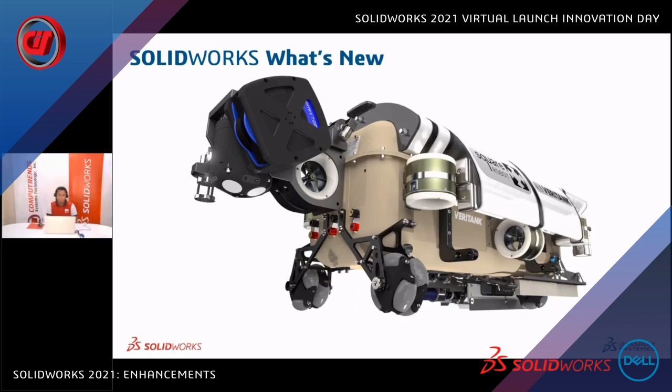As we dissect this incredible assembly from Square Robot, we will showcase the groundbreaking enhancements of SolidWorks 2021. We've added countless enhancements by expanding functionality that will simplify and speed up your workflows. With popular demand, we have increased our focus on performance, reliability, and optimizing pre-existing workflows to work exactly as you always intended.

We will show you many of our exciting SolidWorks 2021 enhancements one by one, so you don't miss out on anything this release has to offer. We will focus on three major topics: expanded functionality, performance, and SolidWorks 2021 in action.

Expanding SolidWorks capabilities always presents opportunities to approach your design challenges in new and powerful ways. SolidWorks 2021 delivers new tools that will streamline your workflows, improve your productivity, and deliver better performance and reliability.

Let's start with expanded functionality. Assembly modeling delighters: we have better mate and pattern control, and Excel-based interference reports.

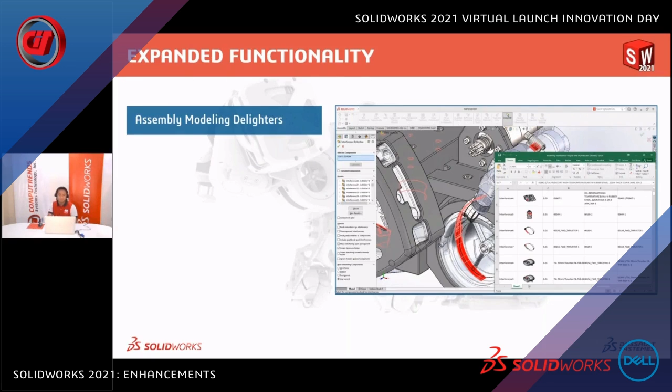Enhanced assembly simplification, faster open times of files, faster loading of lightweight models, and now we can save feature versions as configurations, with improved graphics performance.

More flexibility for part design: we can redo more than 60 features with SolidWorks 2021. Edge flanges on non-planar edges, equations in file properties, and the ability to use the color picker anywhere.

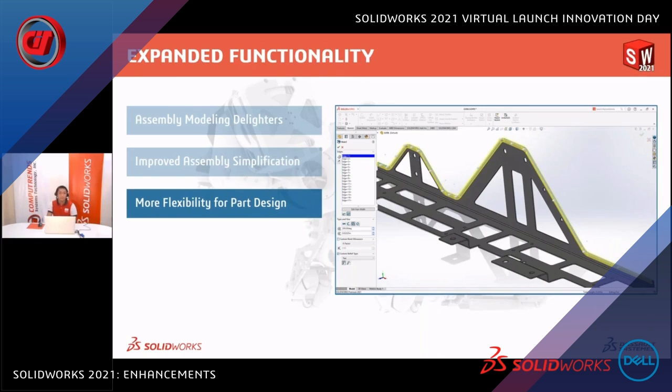SolidWorks has been known to have an intuitive and customizable user interface. However, by listening carefully to users, SolidWorks 2021 is packed with enhancements that make it easier to use and more customizable.

We'll find an improved color picker that can refer to other applications such as a web browser, a command search within the customize dialog that makes it easy to customize toolbars, a customizable command manager that gives you more space to work, as well as semi-transparent dimensions, making it easy to select dimensions.

For performance, all-new performance-based enhancements in SolidWorks 2021, from new performance enhancements to assemblies and drawings, to more powerful simulations, will ensure that more of your time at SolidWorks is focused on design.

Detailing mode enhancement for performance: speed up your drawing creation with improved detailing mode, with even more editing abilities.

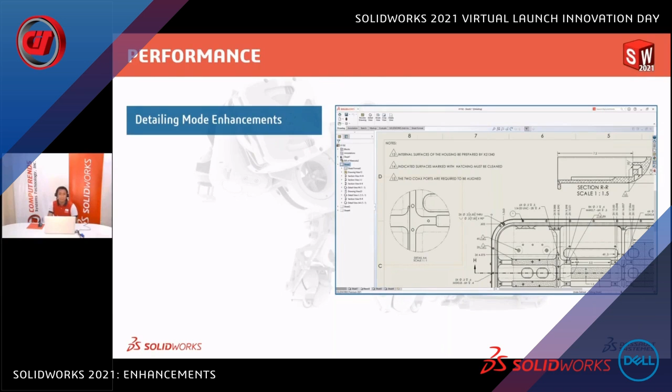Drawing performance: SolidWorks improves drawing performance for selection, panning, and zoom, regardless of how big the file is, making your everyday work faster.

Graphics performance: enhanced scaling and silhouette edges, and use more of your GPU for faster frames.

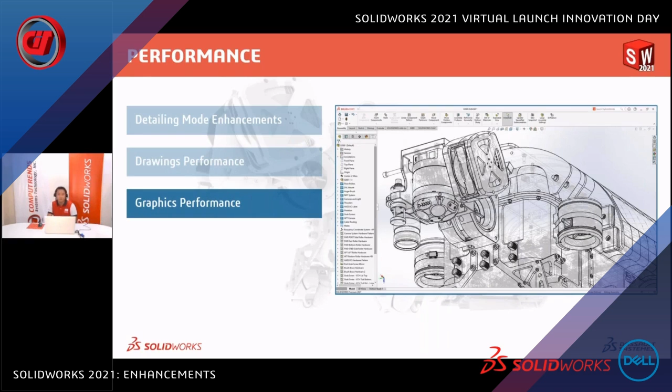Assembly performance: faster file operations, configuration switching, and automatic lightweight mode resolving, all helping with the most complex assemblies.

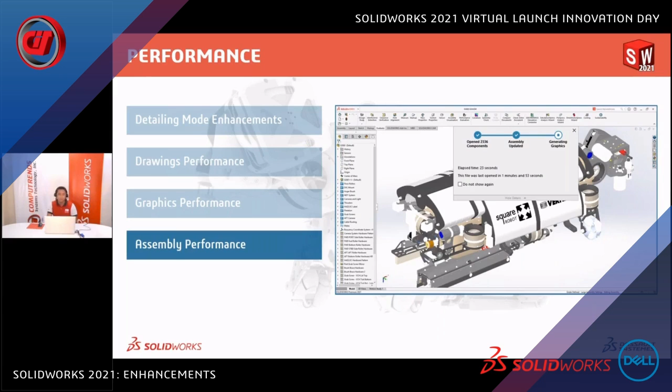Every year, SolidWorks focuses on enhancements, innovation, quality, and performance. This year, SolidWorks is devoting 58% of its resources to one thing: quality and performance. These are areas that have always been a focus for SolidWorks, but this year there has been a lot of effort to achieve some notable improvements.

SolidWorks 2021 and the development cycles associated with it closed more SPRs than any other SolidWorks release. This has resulted in a 25% increase in verified fixes since 2015.

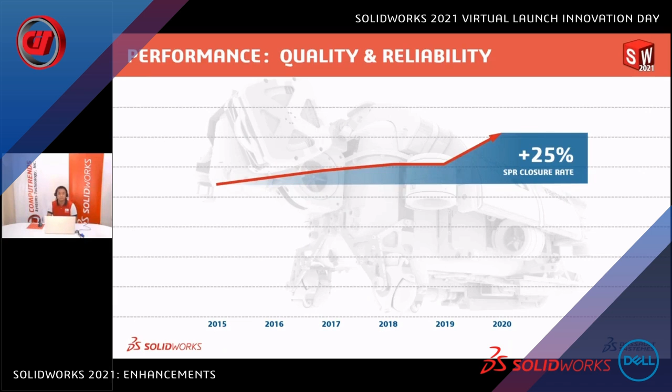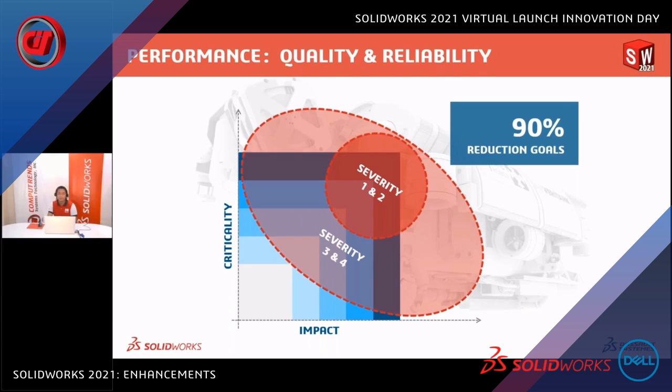Over the last year, we've seen a reduction in open SPR. Our goal over the next releases is to get this down to less than 10%. This is our main objective to ensure you having the most powerful and reliable design tool.

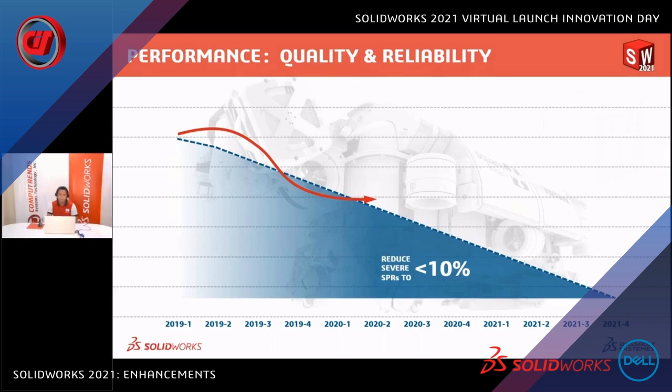Now that we have seen some of the highlights, let's take a look at SolidWorks 2021 in action. We have many demos to show you, so sit back and relax. Each section presented here has many demonstrations, which highlight many different software enhancements and improvements.

Let's start with the user interface experience enhancement in SolidWorks 2021. Oftentimes, customizing your user interface is a balance between minimizing clutter and having the right tools accessible when you need them. With SolidWorks 2021, you no longer have to choose. Let's take a look at some of the enhancements of user interface.

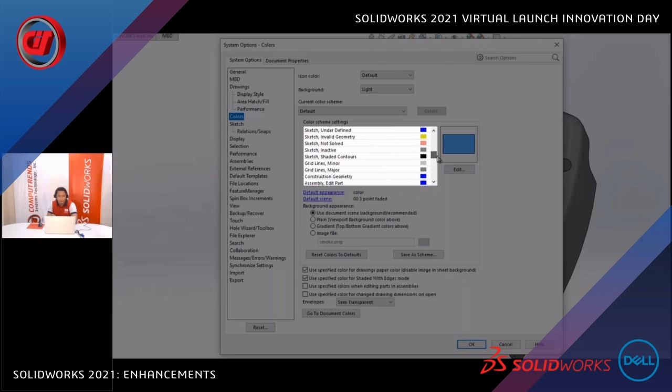To complete this part, we need to cut and pattern this sketch. However, the sketch and part of the color are the same. Changing this color setting is always available, but in SolidWorks 2021, a column of color representatives is presented, making it easy to find the item you want to change. Let's use a green color to make the sketches more visible.

Also new to SolidWorks 2021 is the Command Manager Collapse capability, which allows you to regain as much real estate on the screen as possible.

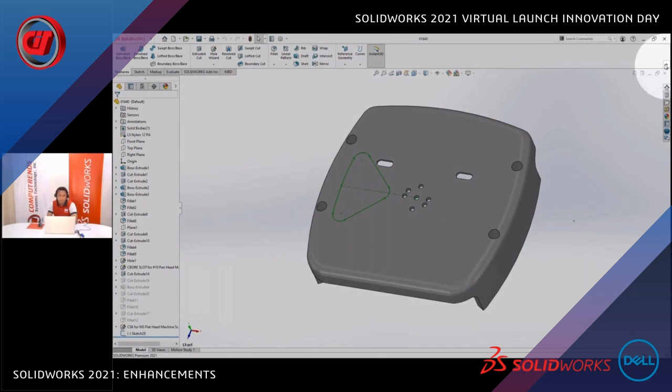Switching to the quick access tools in Command Manager further reduces excess icons and helps you focus on your design. All tools are still available using the tabs at the top of the screen, but a faster way to work is to use the S keyboard shortcut.

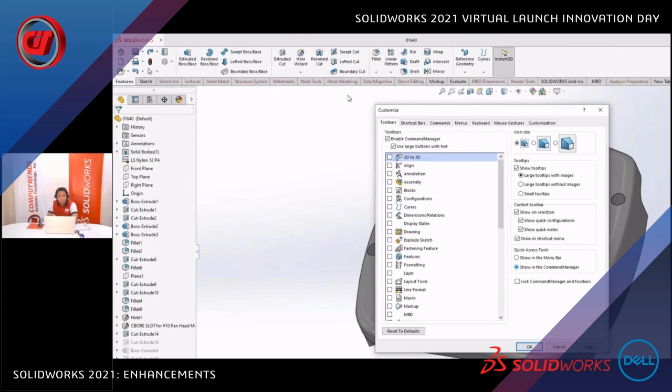However, it does not yet have the circular pattern we need. No problem. Simply search for the command new to 2021, then drag and drop it onto the shortcut bar. This is a convenient way to customize any area of SolidWorks user interface, including the heads-up display toolbar.

Now that we have set up our shortcut bar, finishing our design is easy. Notice how small the mouse moved to create this cut using the sketch, and the pattern it around on the center hole.

Mistakes are easy to correct using undo. Now the SolidWorks 2021 redo is more complete, allowing you to redo feature edits. This means that if you accidentally undo a feature, you won't have to spend extra time recreating it.

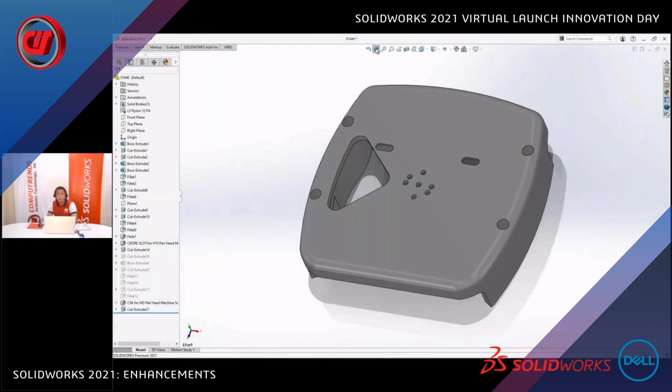With SolidWorks 2021, you no longer have to find the perfect balance between the user interface and access to the tools you want. Just customize your workspace with new enhancements so you can focus on your design.

SolidWorks 2021 introduces many enhancements to expand powerful capabilities when working on parts. Let's see what those enhancements are.

Let's focus on the parts we want to work on and take a look at some sheet metal enhancements, 3MF support, and some new capabilities for weldment, and let's look at some other enhancements along the way.

When working with sheet metals, we have been able to create an edge flange with curved edges like this on the right, but with limited curved edges derived from planar faces. Now, in SolidWorks 2021, edge flanges can be created on curved edges that come from non-planar faces, such as those in the bend area. The preview shows how to create the edge flange all around the part.

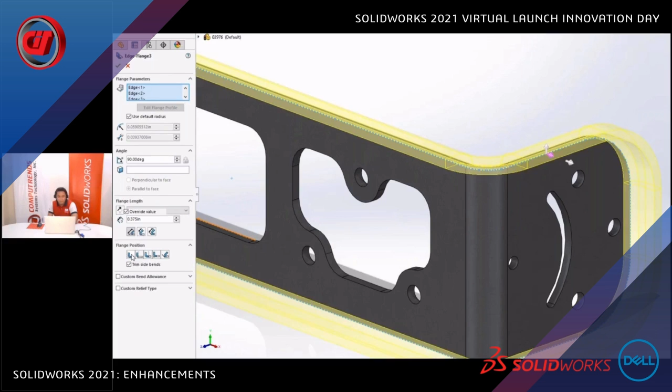Familiar flange customization tools are available to help define the edge flange, such as length, angle, flange length, dimensioning method, and flange position. This new edge flange looks great and is sure to provide more stiffness in the angle bracket.

The side flange on the side needs to protect the parts of this control unit. Full editing capabilities are available, so we can change the direction of the flange as well as the angle to wrap the inner parts to keep them safe.

The new flange edge capability along the nonlinear edges extends the capability of the SolidWorks 2021 sheet metal for many applications such as adding stiff ribs and enclosures.

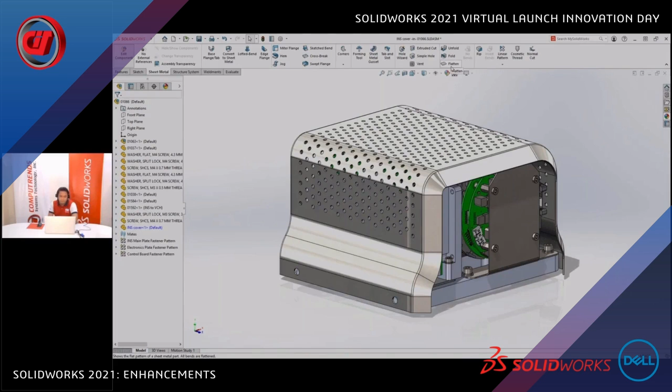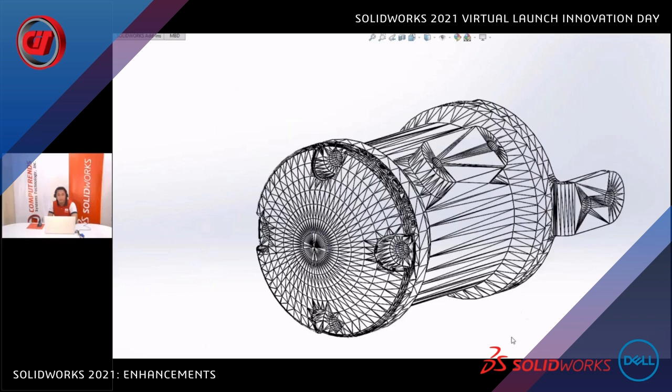When opening a 3MF file in SolidWorks 2021, we now support many other displays. Per-facet and per-vertex coloring, as well as textures and transparency, can now be displayed when importing 3MF files as graphic bodies. Additive manufacturing continues to rise in capability and popularity, and SolidWorks will continue to embrace this technology.

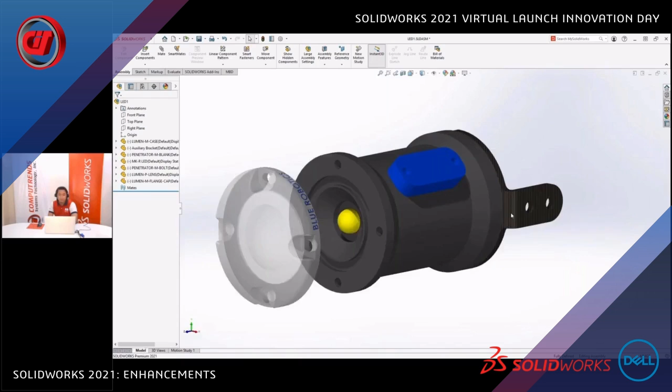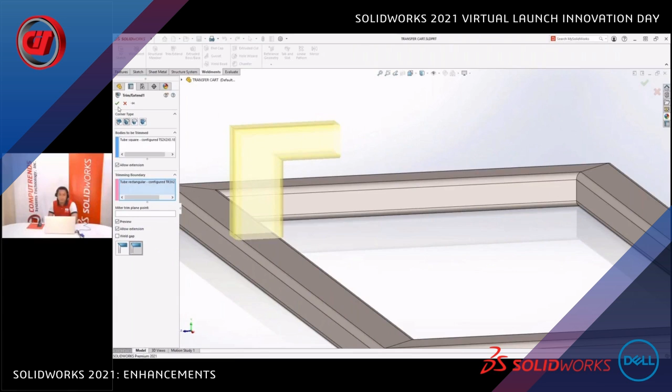In SolidWorks 2021, there is a new option for miter trims, the flush miter. It trims the pipes so that they meet flush. Other vertical members are mirrored, so they update as well.

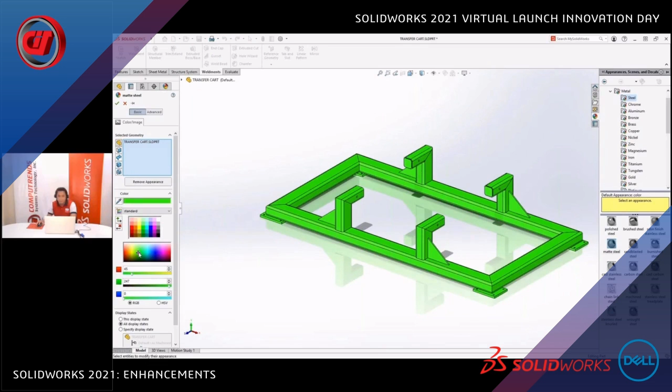This weldment needs to be painted, so let's edit the look and choose a color. We have different colors to choose from color palettes, or we can use the color spectrum to define a custom color. But oftentimes, we have to choose specific colors dictated by our customer.

Let's take a look at the Square Robot webpage. Here we can learn all about their products and their initiatives, but we really like the color on the banner of this page. Now, with SolidWorks 2021, there is an option for easy selection of colors that are not on the palette.

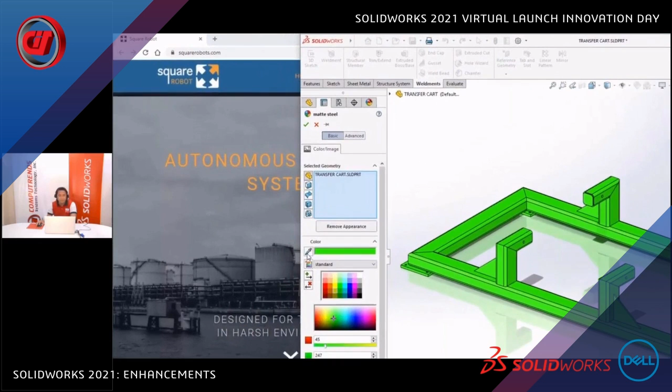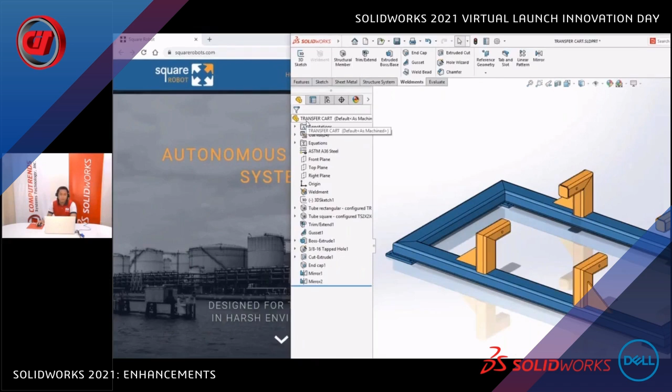Just drag the dropper icon anywhere on the screen and the color under the dropper is applied to the selection. For vertical members of this weldment, we want to have a different color. Let's select some of these bodies and drag the dropper to the orange color of the logo to apply it to the bodies. The new color picker works with any image displayed on the screen, including colors from popular paint vendors and color system websites.

Custom properties are a great way to store information about a document, such as description, date of creation, or material. They can be used automatically to fill title blocks, material, and PDM fields.

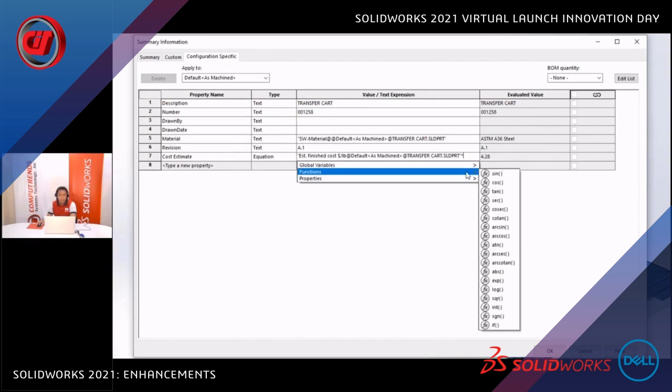Sometimes it is necessary to calculate a result to define a custom property. Now, in SolidWorks 2021, equations are supported on custom properties. Select equation as the property type, and you will have access to global variables, mathematical functions, and other properties. For this weldment, we want to define an estimated cost based on the global variable, which is an estimated finished cost, and multiply that by the mass of the parts. This gives a result of

4.28. Equations can be used to calculate the cut list as well. This plate in the cut list is used 4 times, and we want to know the total length of all the plates together. Redefine the property name, select equation as the property type, and for this calculation, we want to multiply the number of plates by the length of the plate, resulting in a total length of 20.52.

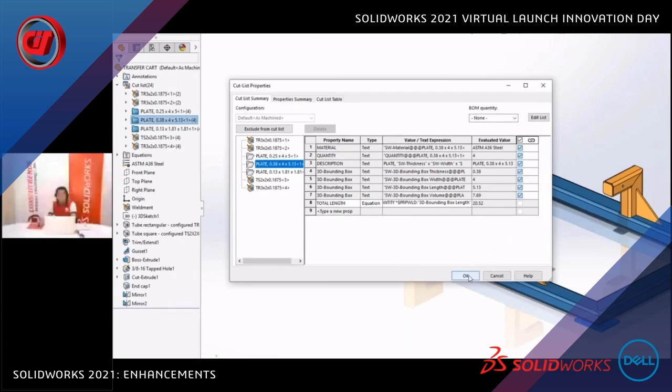Parts are the foundation for creating assemblies and drawings, including new curved flanges, enhanced 3MF support, new weldment trims, custom color selection tools, equations, custom properties, and cut lists. SolidWorks continuously enhances its capability when working on parts.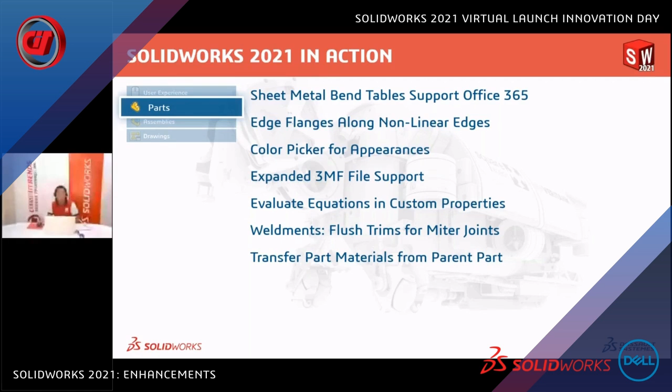In past years, the performance of large assemblies has greatly improved, and SolidWorks doesn't stop enhancing and innovating each year. There are two assembly demos you're about to see, productivity enhancers and graphics performance gains, that I'll show you side by side.

As you spend time creating and working within your assembly designs in SolidWorks 2021, you will find more streamlined tools to help you assemble, pattern, and analyze your assemblies. Now, when mating in SolidWorks 2021, you will find a new streamlined property manager. Instead of expanding sections for each group type, there are now tabs for each group, making it easier to find the correct mate.

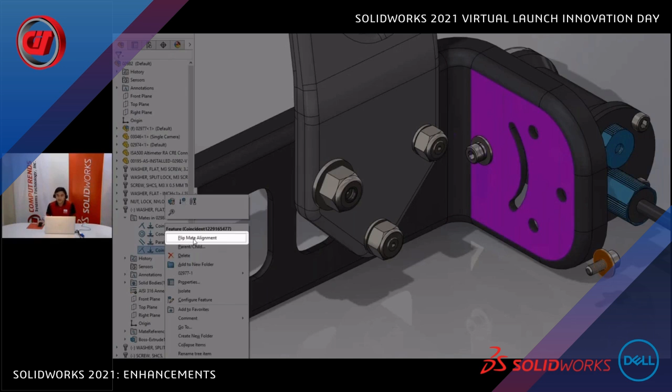Looking at the previously created mate, switching alignment presents the question as to how to handle the other components and mates impacted by this change. Choosing no oftentimes means overdefining other mates to solve for the new alignment, which creates more work to fix. Choosing yes would have avoided this issue by instead flipping the other affected mates, making this task a simple fix.

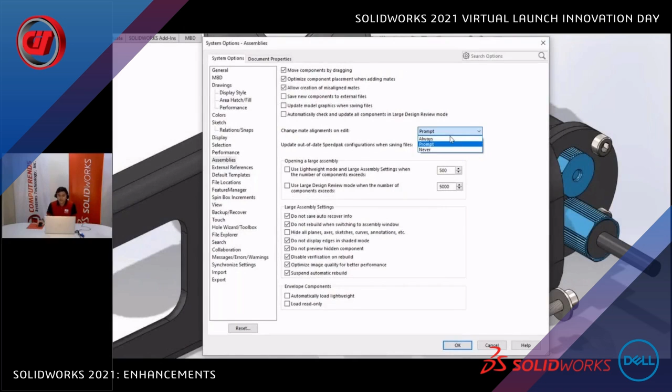In SolidWorks 2021, there is a new system option under Assemblies to choose how to always select one of these choices, or retain the prompt. Choosing always by default will flip the alignment of other mates affected in this scenario. This saves time and confusion and ensures you always get the results you desire.

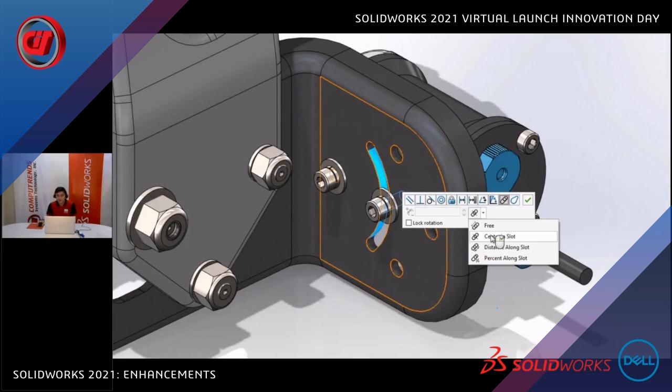When creating mates to slots in SolidWorks 2021, you can now choose the default type of position. In this example, center of slot has been selected as the default choice. Likewise, there is now the option to lock the rotation of slot mates, similar to concentric mates. The default slot mate location is a new document setting found under mates. This eliminates the need to regularly change the location type when adding new slot mates to your designs, saving you a little bit of extra time and preventing accidentally choosing the wrong constraint.

SolidWorks has always offered the flexibility to change the configuration of each component instance within a pattern. However, sometimes you just want all of the components to reference the original instance. This can be time-consuming to do one at a time.

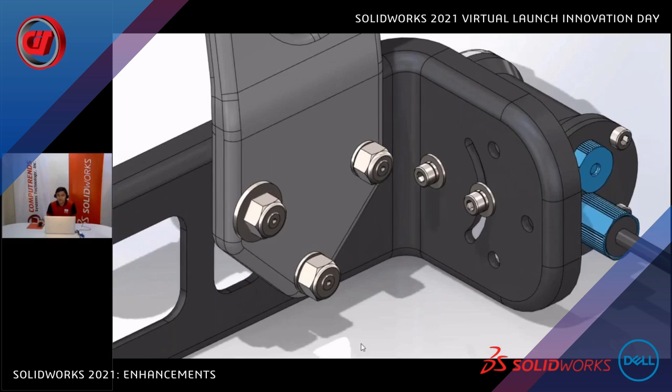New in SolidWorks 2021 is a new option to synchronize the configurations of all component instances created by the pattern.

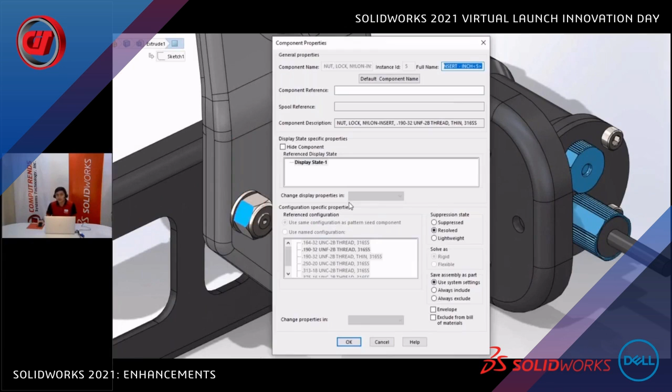This new option also helps by preventing changes to the configuration of any of these components from the quick menu dropdown, by locking this option within the component properties dialog. This ensures that as you make configuration changes to the seed components of the pattern, those changes will be properly propagated.

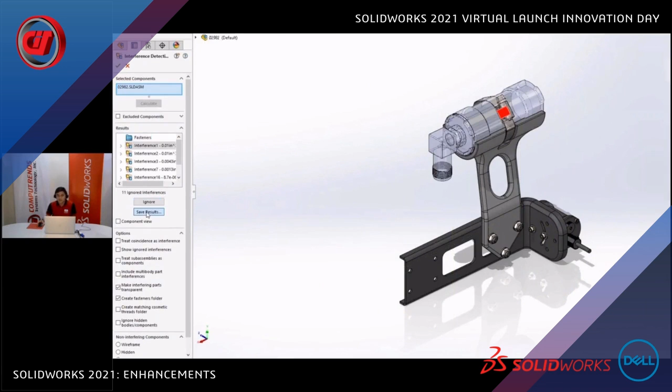Interference detection is a powerful tool to quickly find issues within your design. SOLIDWORKS 2021 now offers the option to save these interferences out in a spreadsheet. You even have the choice to capture a screenshot of each interference so they can be shared and reviewed with others inside your organization. This offers a new collaborative way to review interferences in a design, determine if they are intentional due to fit conditions, and collaborate with others on what changes should be made to solve the interferences.

SOLIDWORKS 2021 offers new tools like this to help you design more efficiently by streamlining and adding value to your common workflows.

You demand the best performing tools so you can work as efficiently as possible. SOLIDWORKS 2021 delivers multiple new enhancements to access your data faster and work more efficiently.

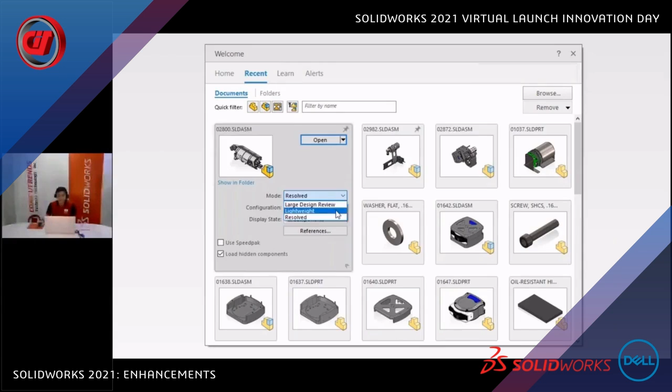Open times for both resolved and lightweight assemblies have been improved in SOLIDWORKS 2021. This 2,259 component assembly opens in only 21 seconds, making getting into your design faster than ever. The larger the assembly, the greater gains you will see while opening them in lightweight mode.

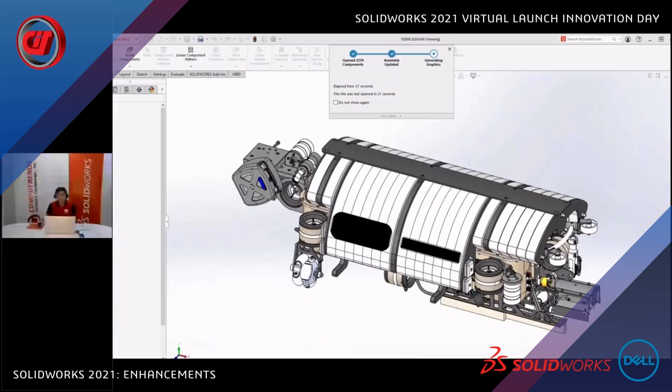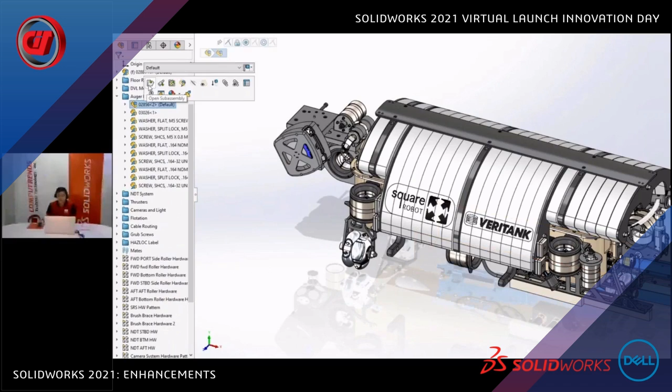To improve working with lightweight components, there is now also a more streamlined approach to accessing their assembly and feature information. Simply expanding a component from the Feature Manager tree will now dynamically load those components on demand, giving you access to the fully resolved sub-assembly or part. This prevents unnecessary loading of large assemblies, but also allows you to quickly access and resolve the components you're working on as needed.

Working with configurations in SOLIDWORKS 2021 is now also faster. Switching between and creating new configurations are now significantly faster for assemblies.

The performance evaluation tool within SOLIDWORKS has always been an invaluable resource to give insight into areas of the design that may cause performance degradation. New for SOLIDWORKS 2021 is the analysis and reporting of circular references within an assembly.

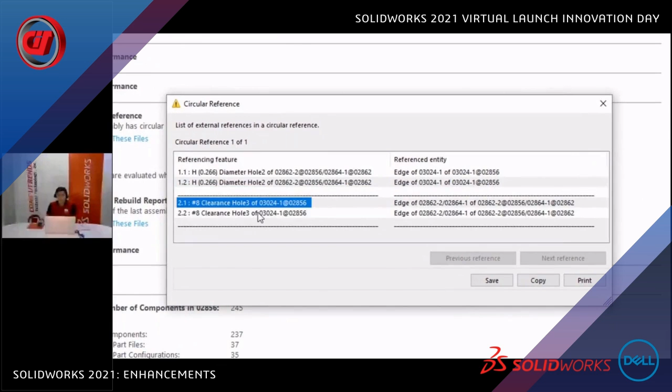In this case, two holes on two separate parts have been found to reference one another. You can use this information to further investigate the design and determine how they are referencing one another to fix these issues.

In this scenario, one of the components listed in the report contains a hole wizard feature, where its location sketch has center points that are referencing the edge of a hole in the adjacent part to locate them concentrically. This is a common top-down design practice to ensure that holes always remain aligned to one another.

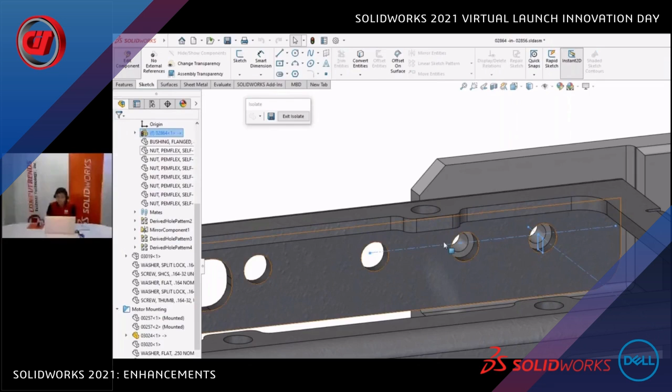However, investigation of the second component feature, also a hole wizard, shows that the center points within its sketch are likewise referencing the edges of the previously interrogated holes. This creates a circumstance where both features are trying to define the location of each other, or a circular reference.

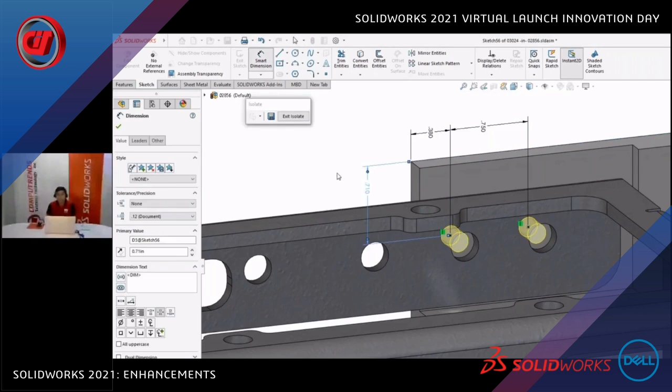To fix this scenario, the best course of action would be to remove the external references and redefine the location of the hole centers in one of the sketches—in this case, dimensionally, to the part they reside within. Once the changes have been made, a quick rebuild removes any warning from the assembly.

Finally, you can use Silhouette Defeature, introduced in SOLIDWORKS 2019, on an assembly to create a simplified representation of it or to protect proprietary information.

The Silhouette Defeature provides an intuitive step-by-step workflow to define the simplified version using a variety of geometry simplification tools. While you are selecting the components, bodies, or sub-assemblies you want to simplify, you will always have a side-by-side view to show what your finished representation will look like. This ensures that you can capture the correct amount of detail.

The methods you can use to simplify your geometry range from something as simple as a bounding box or cylindrical representation of the components, to something a little more complex like the polygon or tight fit methods, which add a bit more detail to the final results.

Perhaps some of the components in your subassembly are critical to show in a top-level design, even within a simplified representation. For those instances, you can choose the copy geometry method to capture all of the detail of the components, bodies, or subassemblies.

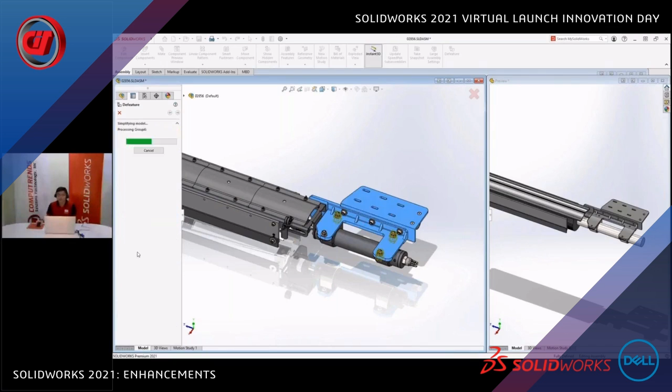What's new for Silhouette Defeature in SolidWorks 2021 is the ability to save the simplified representation as a configuration within the same assembly from which it was created.

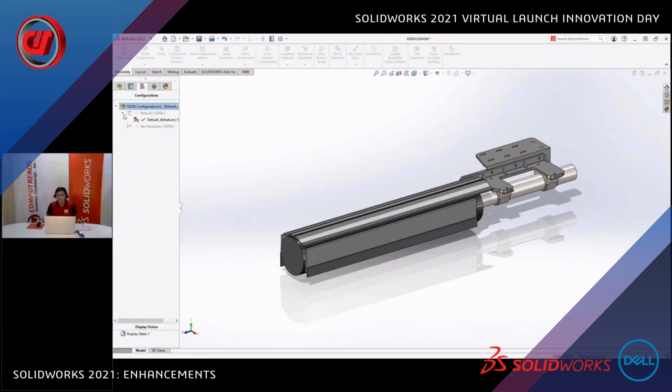This eliminates the need to manage a separate file that contains the simplified model. You may still want to use other methods when using Defeature to remove proprietary information from a design to share outside of your organization as a separate disconnected file. However, when using defeatured models within higher level assemblies, it's now as simple as right-clicking on the component.

and choosing to use the defeatured version. Defeatured assemblies as configurations provide a way to both simplify complex assemblies visually and also add a performance boost in cases where all of the detail of the individual components is not necessary.

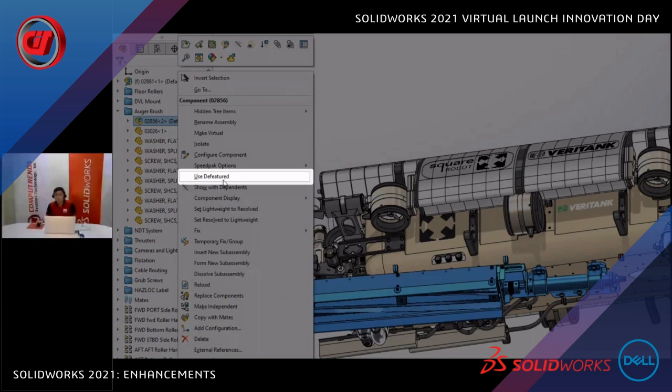With these new performance-oriented features in SolidWorks 2021, you will be able to work faster and more efficiently with larger or more complex assemblies.

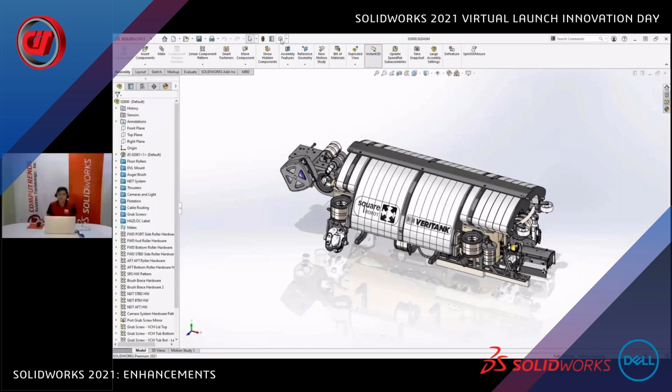Graphics performance introduced in SolidWorks 2019 fundamentally changed how graphics are handled by SolidWorks and your certified graphics card, providing significantly higher frame rates and much smoother response when interacting with larger assemblies. This system option, found under performance settings, is now enabled by default in SolidWorks 2021.

To see the difference, we will compare this setting enabled and disabled side by side, running a macro that performs 500 mouse rotations for consistency. It's clear that graphics performance is significantly faster, but the numbers tell the real story.

These actions only took 7.94 seconds and ran an average of 63 frames per second with graphics performance enabled. Meanwhile, with these settings disabled, these actions took 161.72 seconds at an average of 3 frames per second.

If you haven't enabled graphics card performance yet in SolidWorks, you are sure to notice immediate gains when using a certified graphics card. And new for SolidWorks 2021 are two new enhancements that make graphics performance even faster.

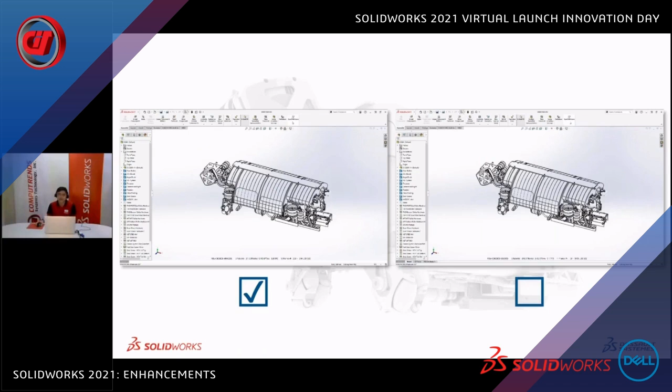The first is when working in hidden lines removed and hidden lines visible. Calculating silhouette edges is a complex task graphically that was previously handled by the CPU. New in SolidWorks 2021, all of these calculations are now handled by your graphics card.

In the case of assembly from Square Robot, there are a lot of silhouette edges to calculate across the model. And like before, the difference is clearly apparent.

With GPU silhouette edges, the macro ran in only 4.71 seconds at an average of 107 frames per second. While with this disabled, it took 170.65 seconds and only averaged 4 frames per second.

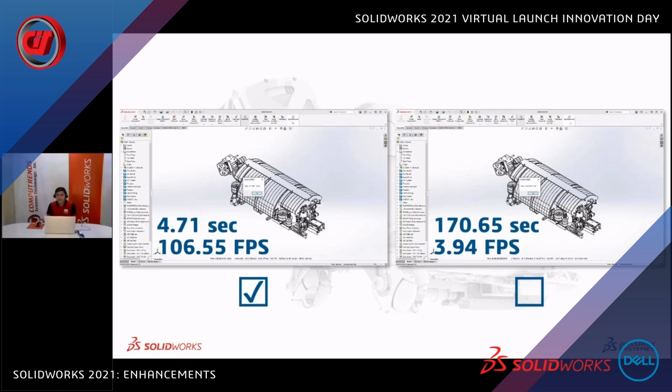The second new enhancement is the addition of occlusion culling technology to graphics performance. Occlusion culling is when it's determined that a model is out of view and doesn't need to be rendered.

With the special development build, the occlusion culling has been paused as this model is rotated. You can see that several of the components that were previously out of view were never rendered by the graphics card. Occlusion culling has a much more significant impact on performance.

The more complex the components asked to be rendered by the graphics card, the more impact it has. So in this assembly, the gains may be marginal, but in much larger assemblies, the gains are much more impactful.

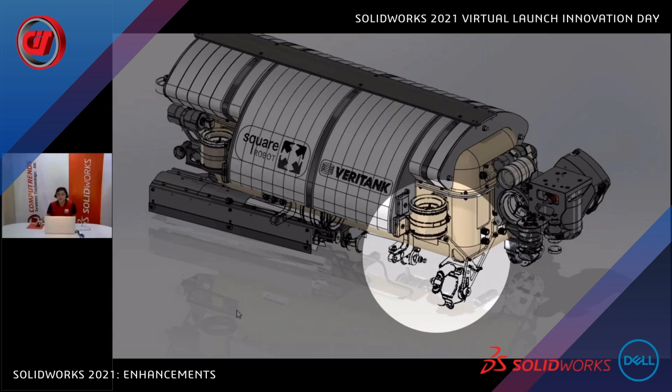Graphics performance in SolidWorks 2021 continues to take advantage of your investment into your certified graphics card, delivering a much smoother and faster experience when working with complex and large assemblies.

With a lot to love about assemblies in SolidWorks 2021, there's no way I'm not going to upgrade.

Along the same themes as assemblies, let's turn now to drawings, which also have some great performance gains to highlight, as well as showing off all you can do in detailing mode.

When working with large assembly drawings, view manipulation is vital to a good user experience. And over the years, SolidWorks has worked hard to optimize view manipulations on screen. Detailing mode was introduced in SolidWorks 2020 to allow users to open massive drawings in seconds.

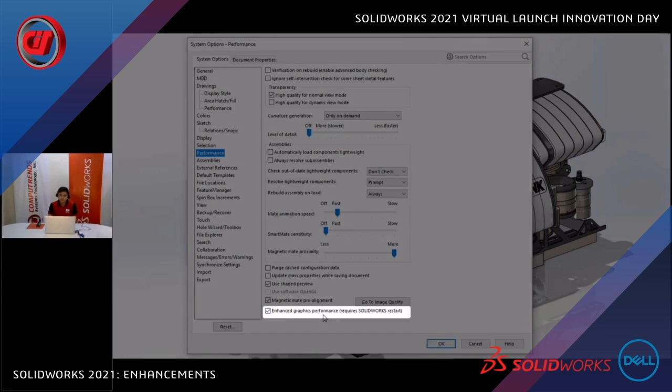For SolidWorks 2021, the enhanced graphic performance option has been extended to the drawing environment. On the left, we have SolidWorks 2020, and on the right, it's 2021. In this side-by-side comparison, the same 5-sheet drawing is opened.

Let's start with panning the drawing in the document window. Notice that SolidWorks 2020 on the left does a good job, but you can see that there is some latency as the drawing does not precisely follow the mouse.

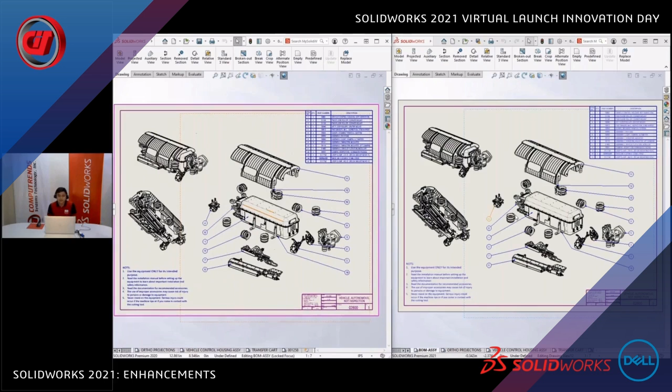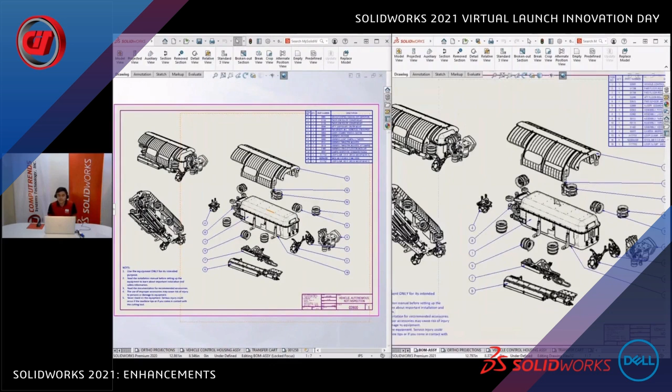The same panning action in SolidWorks 2021 on the right is dramatically faster and keeps up with the mouse, providing a much better experience. Zooming in and out is just as dramatic, and panning while zoomed in is lightning fast.

For comparison, we will repeat the process in SolidWorks 2020. Again, notice the latency, which can sometimes be confusing, as you can overshoot your zoom magnification due to the delay. Panning is better while zoomed in, but not as fast and precise as SolidWorks 2021.

Scroll bar pans show a similar graphics performance gain in SolidWorks 2021. The second sheet of this drawing contains even more views of this 2,300 part assembly, and the performance difference is even more pronounced.

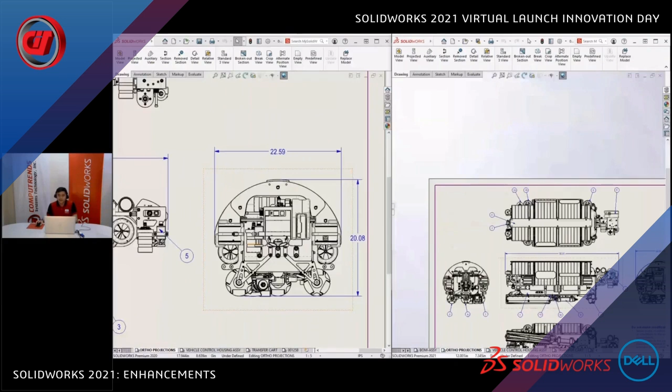For years, the SolidWorks development team has been working diligently to write code and partner with hardware vendors to continue to raise the bar for performance. With the enhanced graphic performance option paired with a modern OpenGL 4.5 graphics card, SolidWorks 2021 is surely a validation of the hard work.

Introduced in SolidWorks 2020, detailing mode provides a way to open massive drawings in seconds. But it's not limited to just viewing the drawing.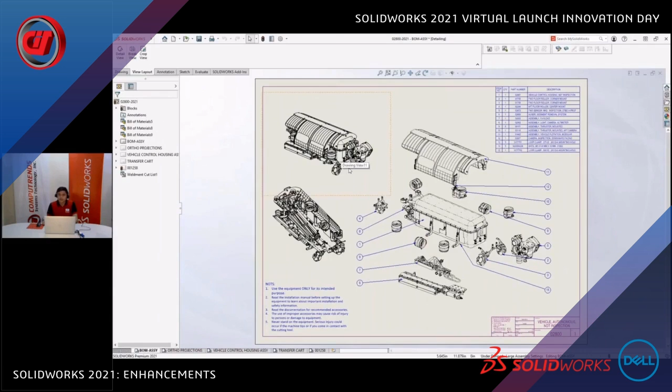Viewing performance is super fast, thanks to the performance improvements added in SolidWorks 2021. Detailing mode allows you to perform typical detailing tasks, such as editing and adding dimensions and annotations. The model does not get loaded, so sharing drawing files is easy. But rest assured, the drawing views are intact and there is no loss of detail.

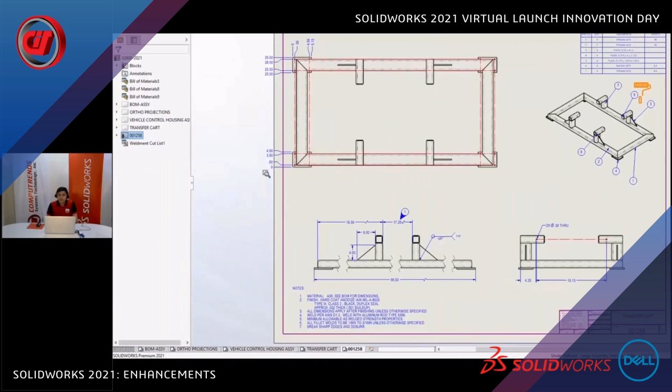For SolidWorks 2021, detailing mode now supports editing for existing annotations such as notes and dimensions. Existing notes can be edited to add or remove information, and you have full access to all of the annotation editing tools. The front view on this drawing is displayed as a broken view with foreshortened dimensions.

This allows more concise display of the information, but the top view is not broken. Now detailing mode supports broken views, crop views, and even detail views.

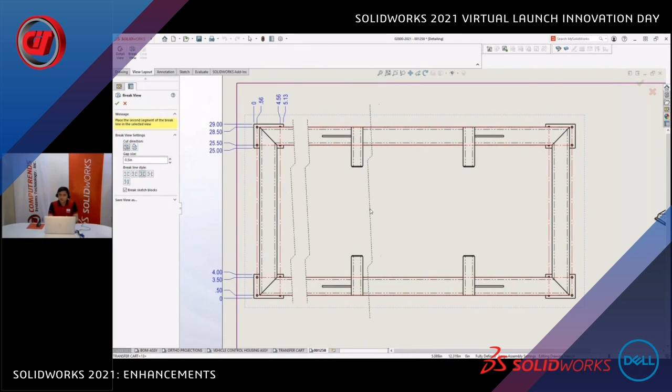Similar to the front view, let's break the top view in 3 places. All of the break line styles are available, as well as the gap between the breaks.

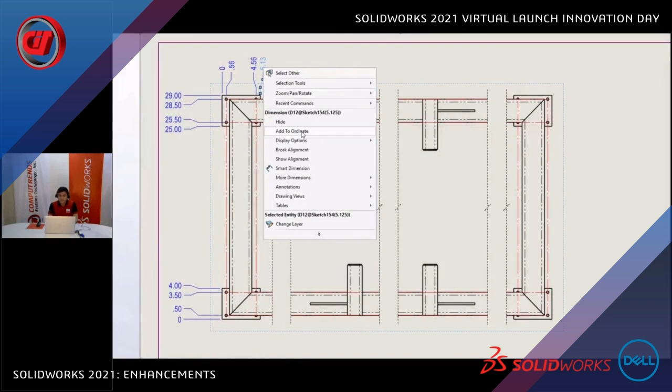Ordinate dimensions are supported, and we can now add additional items to existing ordinate dimensions, such as these edges and center lines.

Detail views can now be created in the same manner as you would when drawing is fully restored. Just draw the detail circle or choose a sketch profile and place the view.

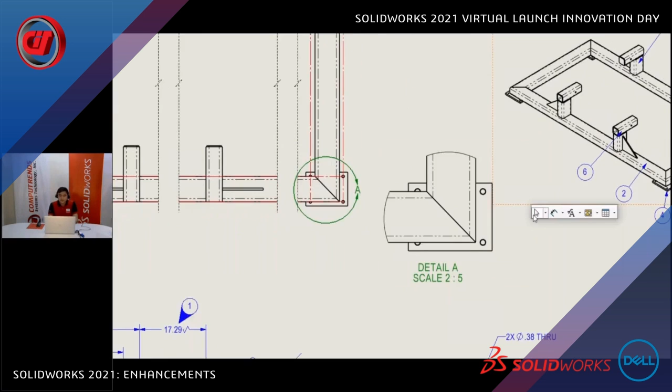When detailing drawings, it's common to define hole information, and now in SolidWorks 2021, detailing mode supports hole callouts, and foreshortened dimensions are applied when necessary.

Existing dimensions now have full editing capability. For instance, the tolerance on the dimension between the holes is important for the function of the part. All of the dimension properties are now available, including its tolerance and precision.

The location of the first hole is not properly defined to the center of the hole. All of the controls on every tab of the Dimension Property Manager are available, so we can define the arc condition of the dimension to the center of the hole.

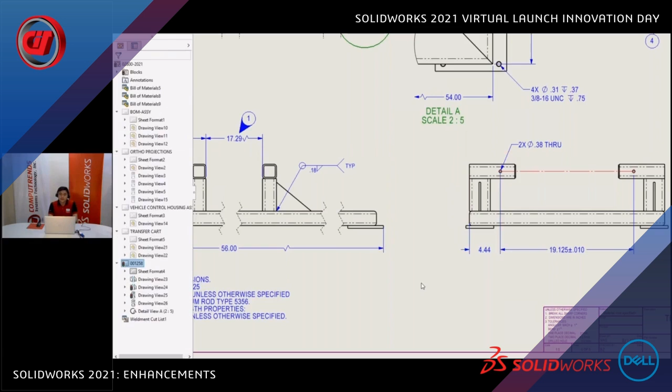So as you can see, these enhancements in SolidWorks 2021 extend the capability of detailing mode to fully detail your drawings in record time, without having to load full drawings containing large assemblies, lots of sheets, many configurations, or resource-intensive views.

But the enhancements to the drawing environment do not stop there. Regardless of how you open a drawing, the Dimension tool has been enhanced to make it easier to create dimensions. Notice that the dimension text is transparent after the first selection, making it much easier to see the second selection.

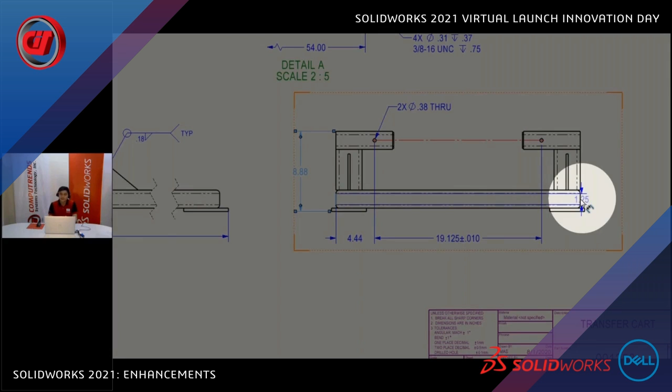VDA balloons are frequently used in the German automotive industry and are a requirement for European customers. A new leader type is now available for balloons and notes to allow users to tag inspection points per VDA requirements.

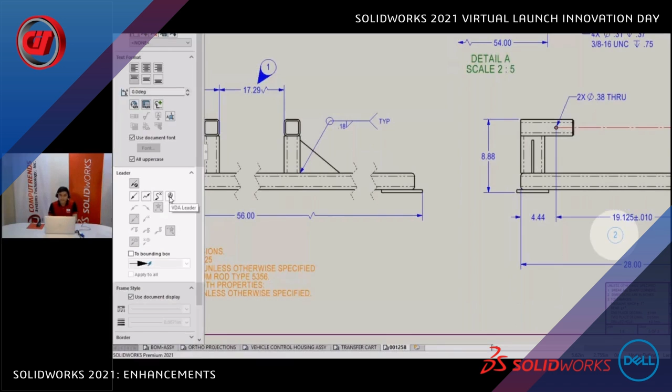Position and rotation are easily manipulated, and these VDA balloons can be used directly by SolidWorks Inspection.

Finally, when working with sketch geometry on a drawing, it is common to add relations just as you would in the sketch environment. Previously, these relations were in the Property Manager, but now in SolidWorks 2021, the Sketch Relations pop-up toolbar is available, allowing you to apply sketch relations with minimal mouse travel.

For years, the SolidWorks development team has been working diligently to write code and partner with hardware vendors to continue to raise the bar for performance, with enhanced graphics performance options paired with modern OpenGL 4.5 graphics cards. SolidWorks 2021 is surely a validation of that hard work.

So as you can see, these enhancements in SolidWorks 2021 extend the capability of detailing mode to fully detail your drawings in record time, without having to load full drawings containing large assemblies, lots of sheets, many configurations, or resource-intensive views.

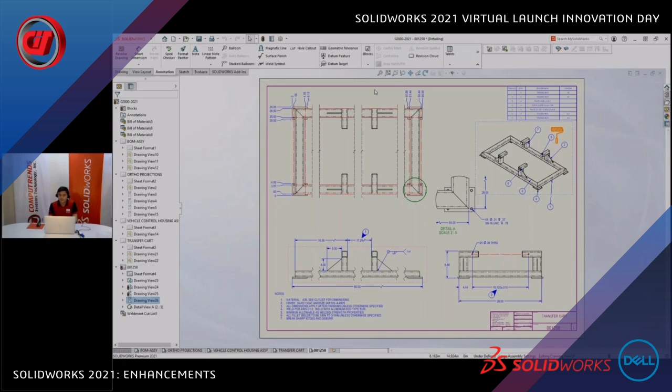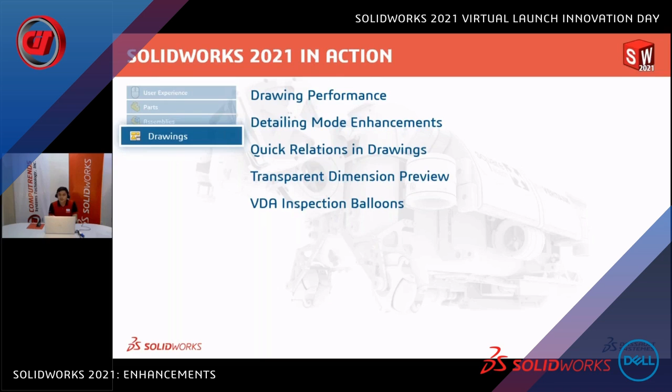Improvements in the drawing environment are always among the most popular enhancements with the SolidWorks user base. And with SolidWorks 2021, the tradition continues.